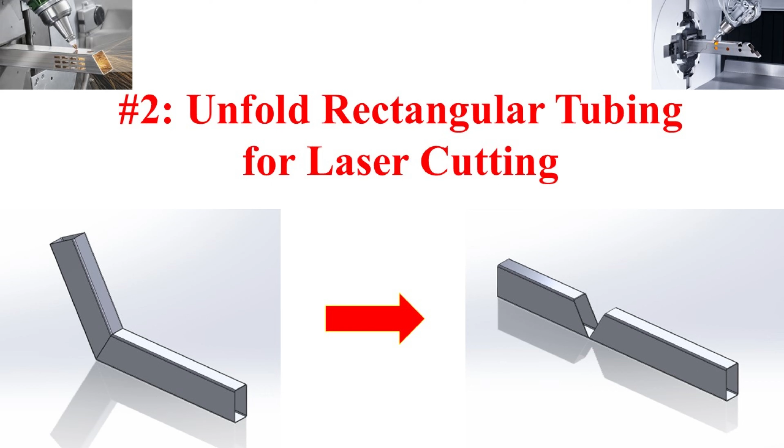Welcome back to the Solidworks channel. Today we're going to start Lesson 2, unfolding rectangular tubing. Let's get started.

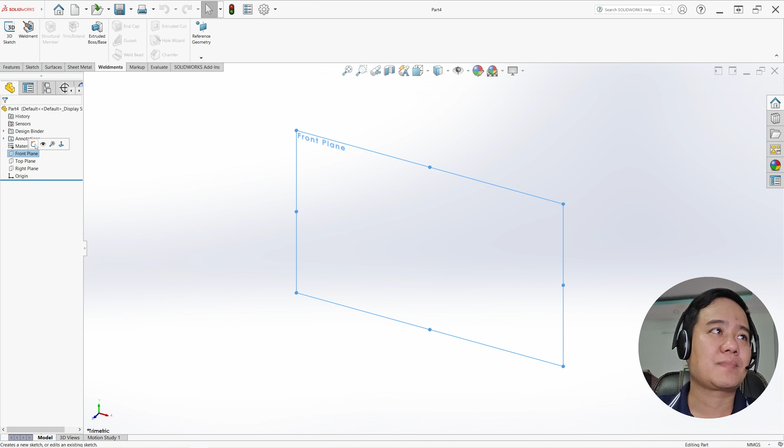Create a sketch on the front plane. Draw two straight segments, one segment horizontal. Add dimension.

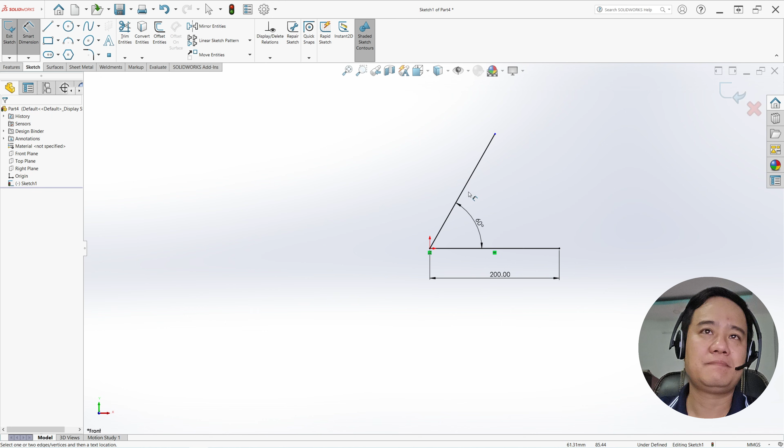Make weldments. Select the Weldments tab. The standard is ISO. Type is rectangular tube. Size is 50 x 30 x 2.6.

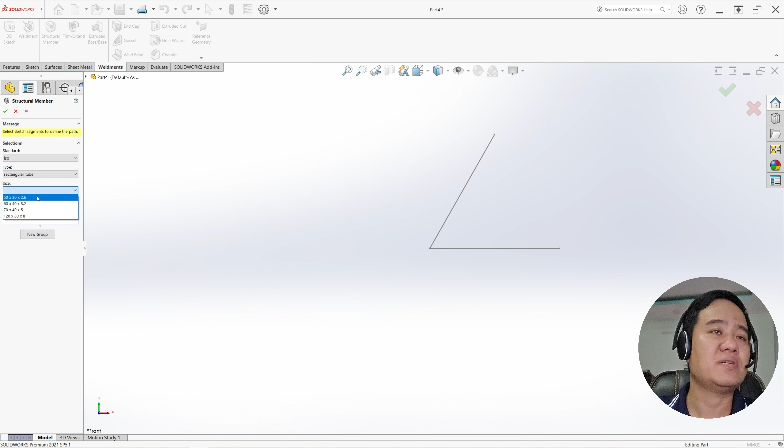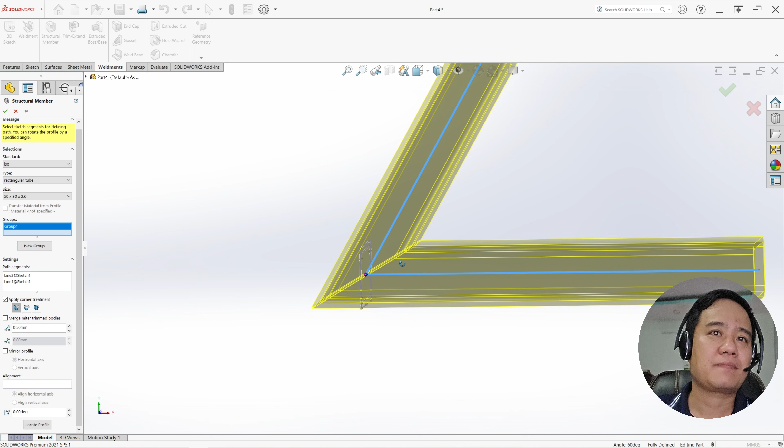Repair the gap from 0 to 0.5 mm. This gap is mandatory so that the combine will not fail.

Modify the locate profile. Outward point.

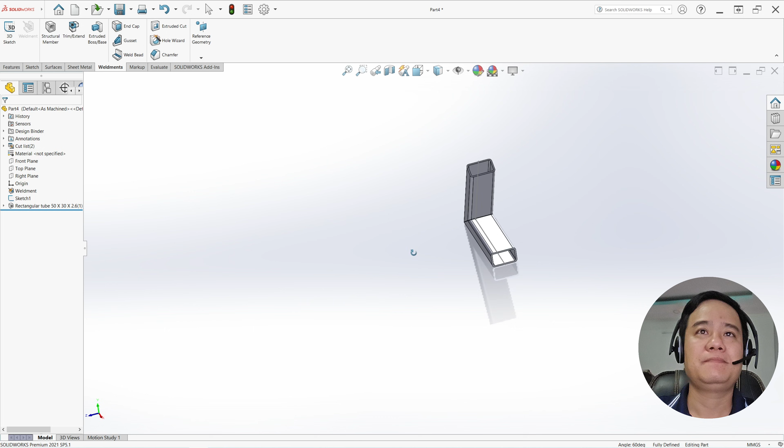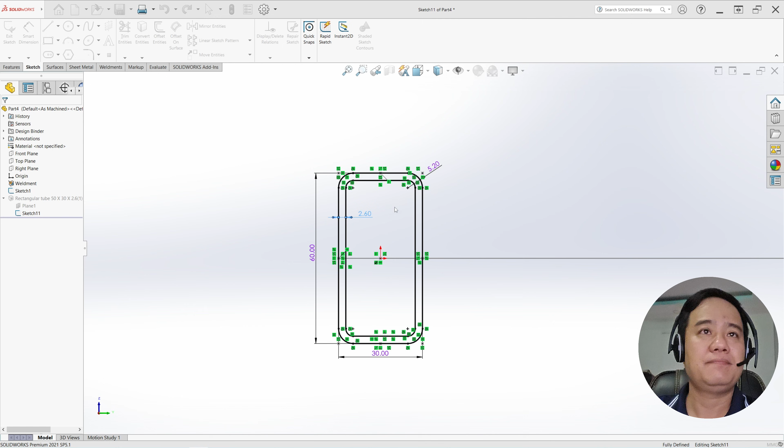Resize the rectangular tube size. Edit sketch. The size is 30 x 60 x 1.2. R equals 3 mm. OK.

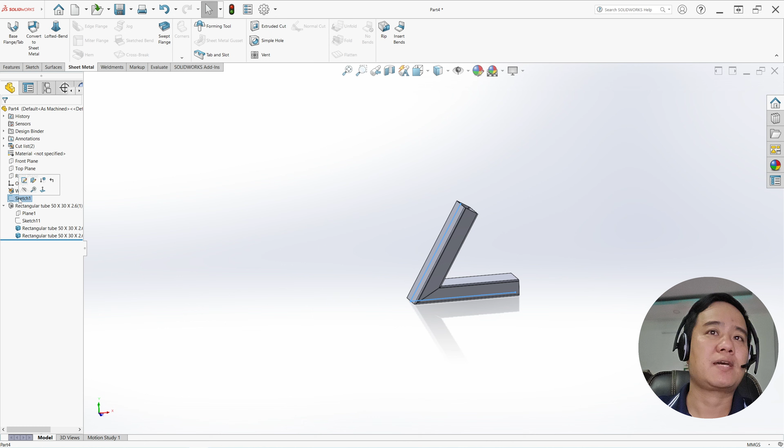The next step, make a sheet metal. Select Sheet Metal tab. Select Sketch. Base flange.

Sheet metal thickness weldments. T equals 1.2 mm. R equals 1.2 mm.

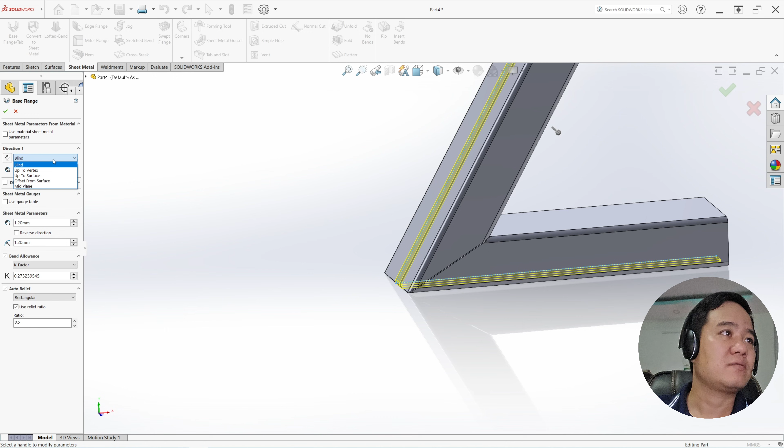Direction 1, select up to vertex. Same with direction 2. Choose the second point here.

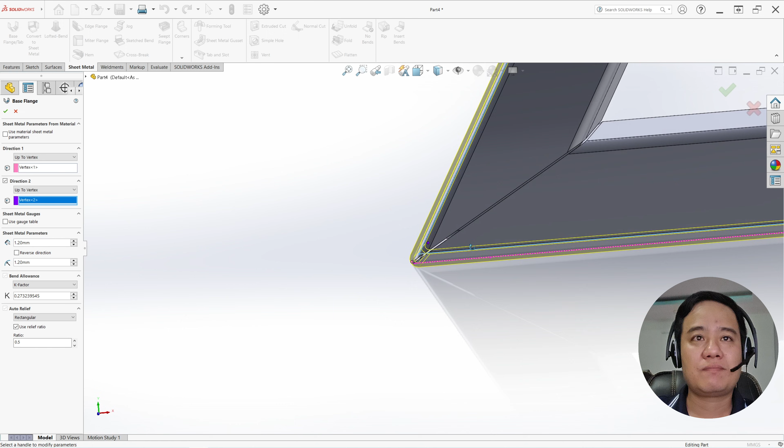Repair of steel plate with box steel. Reverse the thickness direction. OK.

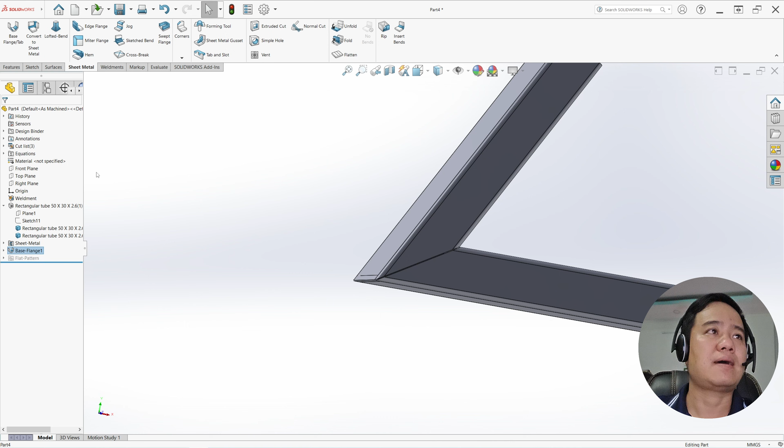Three body: 2 weldments and 1 sheet metal. I'll change transparency of the weldments.

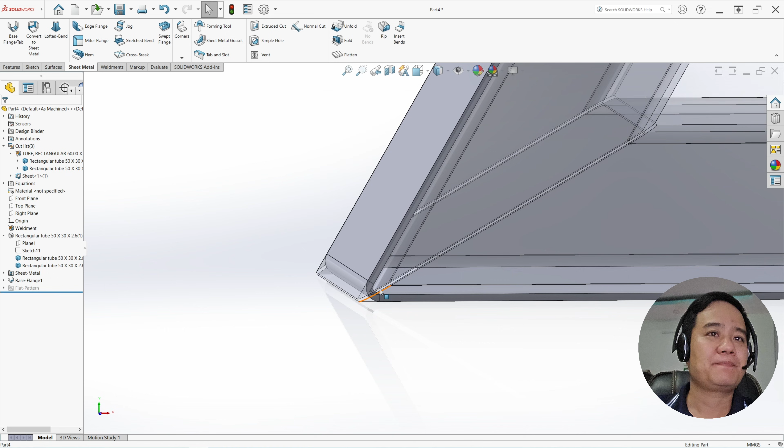The weldments extends into the sheet metal bend area. Cut off the weldments residue.

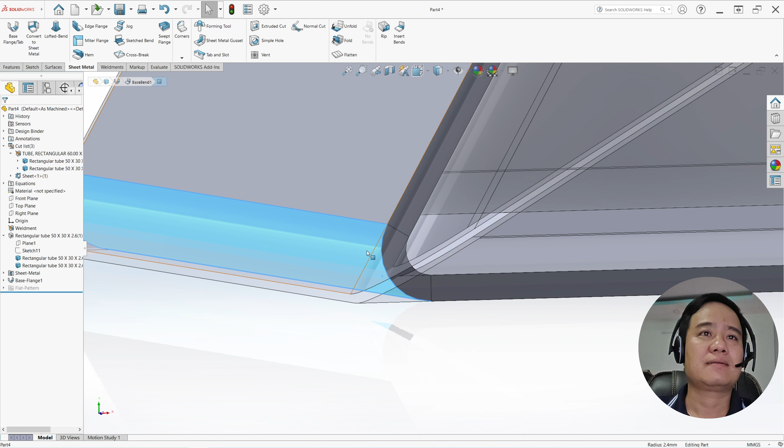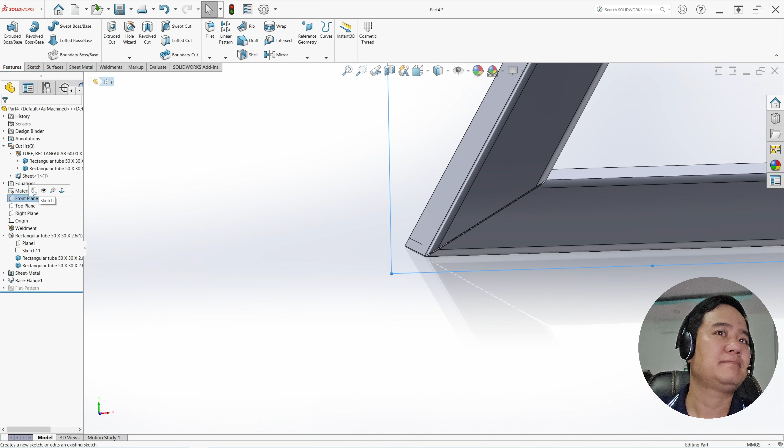Create an extruded cut command on the front plane. Create a section at the front for easy viewing. Draw a circle.

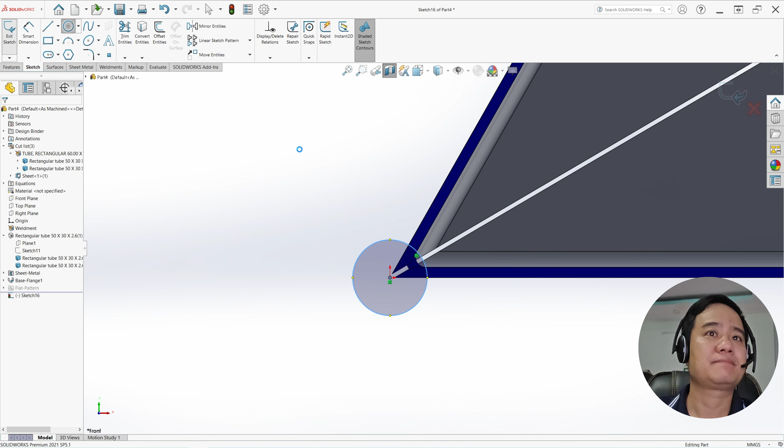Select Extruded Cut. Direction, through all both. Select 2 weldments bodies.

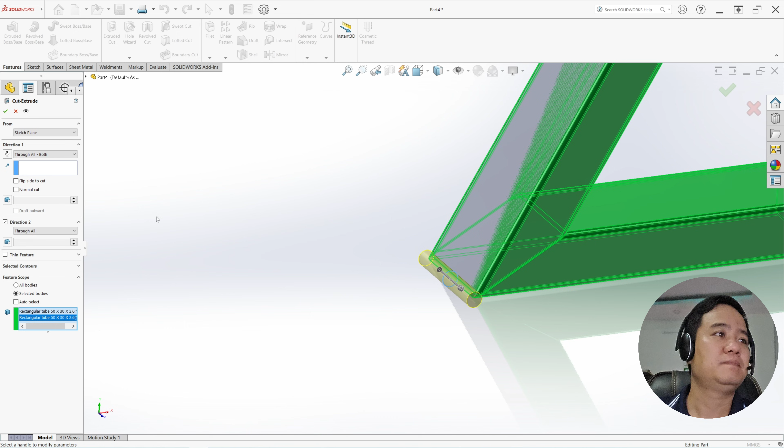The sheet metal bend is now clear, so when you combine together, it won't be faulty.

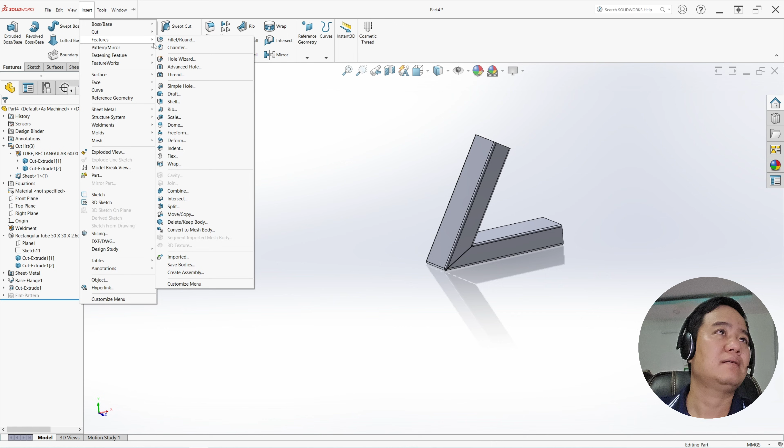Next step, combine 3 bodies. Select Insert Feature. Combine. Combine 3 body.

The details have been completed. Sheet metal tab selection, flatten.

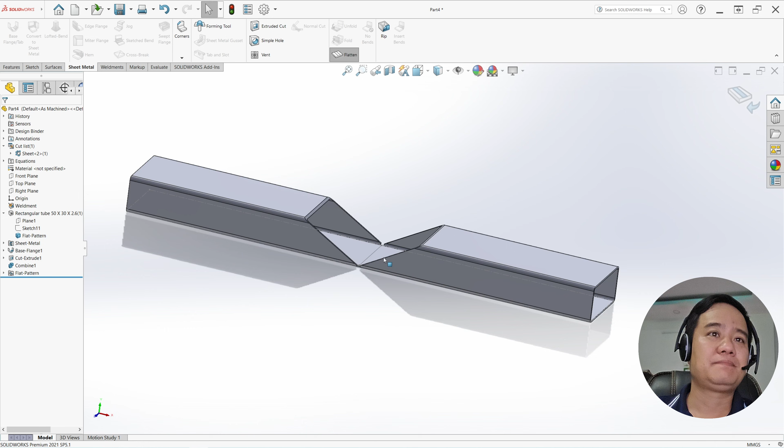The rectangular and square tube are pretty similar, but a little different. Rectangle tube has 1 long side and 1 short side. This fold is on the long side.

But if you want to change how to fold it to the short side, resize the rectangular tube size.

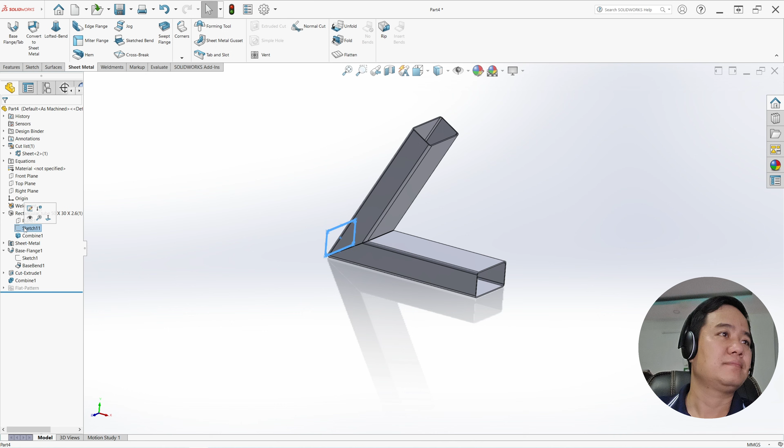We're going to switch back these 2 dimensions. Resize the short size to long size, and the long size becomes the short size.

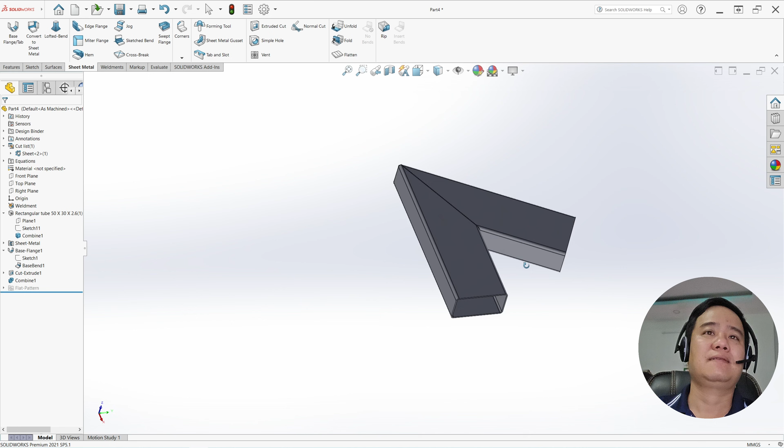We can fold the rectangular tube on the short side. We can completely change the dimensions easily.

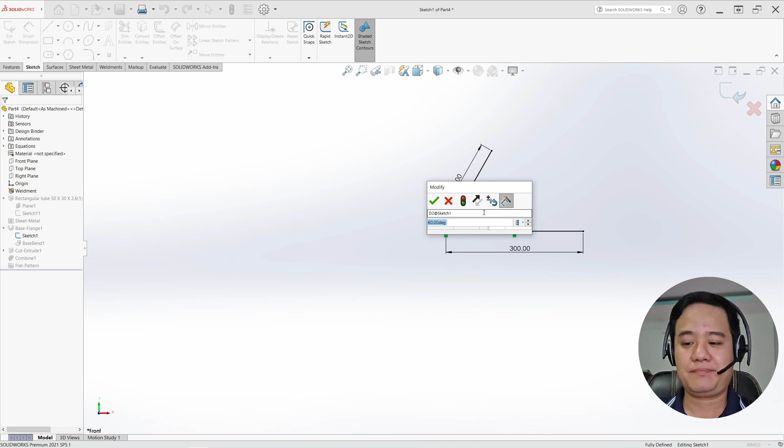Resize horizontal edge size will be 300. The angle is 60 degrees. We've completed a new part.

Flatten. Save file. The name is Part 2. Also save the step file.

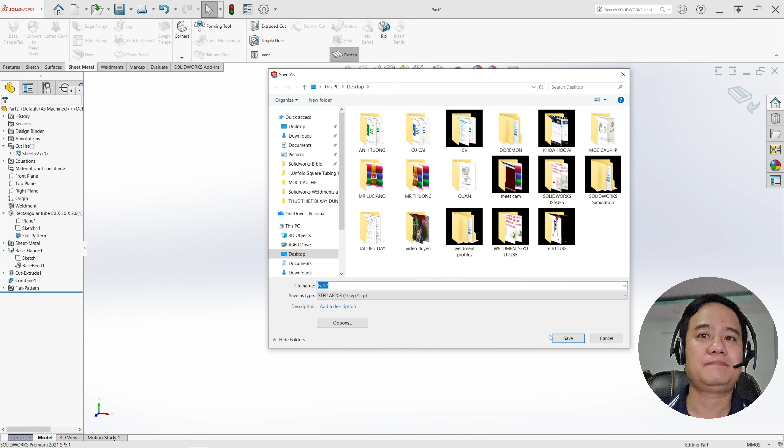Open TubeKit software. Add from file. Select the saved step file. Open.